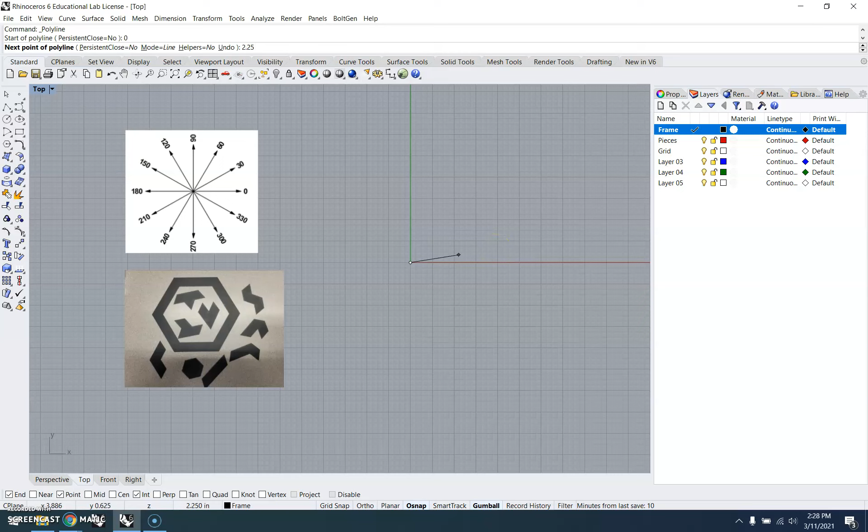So the first thing that I'm going to do is draw the inside of this frame because that's going to be the most important part. I measured and I found that this side right here is 2.25 inches. So I'm going to start with the polyline tool and I'm going to start at 0 just because I like starting at 0. And I'm going to go 2.25 and this time I'm going to go comma 0. What that's going to do is make sure that my line is straight on the x-axis to start with. That way I don't have things rotated funny.

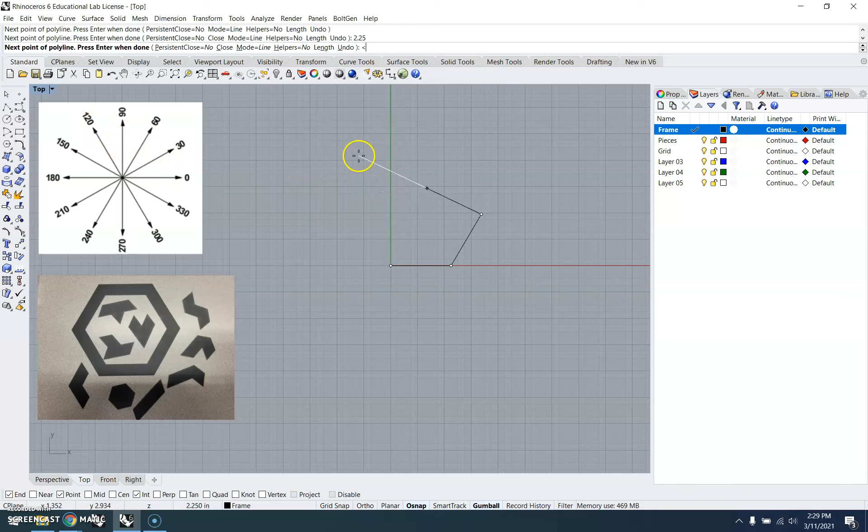And then when I draw this part right here, I'm going to type in 2.25, hit enter, but now I need to use the less than sign, which if we hold shift and click on the comma button, it'll do less than, and then type in 60. Okay, and you see that snaps to 60 degrees because that's that first angle that I want. And then we're going to go 2.25, enter, less than. This time it's going to be 120. So 120, enter, and it'll go up there.

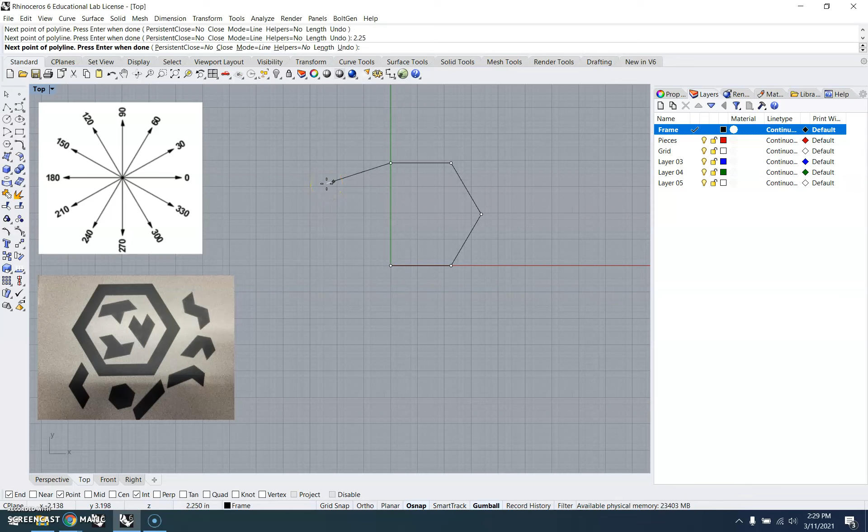Next one's going to be 180 degrees, so 2.25, enter, less than 180, enter, and click. Next one's going to be 240 degrees, so 2.25 inches. Enter, less than 240, enter. We pull that down, and then we can just close our hexagon.

Now I'm going to do an offset to draw the outer one. I measured across here, and it's 5/8 of an inch. We could put that in as 5/8, or we could put it in as 0.625. Either way will work. So I'm going to click on the frame that I have, type offset, go 0.625, enter. And then I'm going to drag it outward. By doing that, I've created this frame that we have right here.

Now I'm going to switch to my grid layer. The grid layer is white, so I make sure I put the check mark next to that. And what I'm going to do is create a grid in here that aligns with the sides of my hexagon. I've measured these pieces, and I know that the shorter straight edges here are 3/4 of an inch. So we're going to create a grid so that we can more easily draw all our pieces based off the grid rather than having to punch in the angles for every piece that we do.

So I'm going to start with the polyline and I'm just going to click and I'm going to do less than 60. Okay, so it aligns right there and I'm going to make it longer than it needs to be. We'll hit enter, and that's okay that it extends out here. As I move this across, I want to make sure that it goes all the way across there. So now what I'm going to do is highlight it, and I'm going to type array.

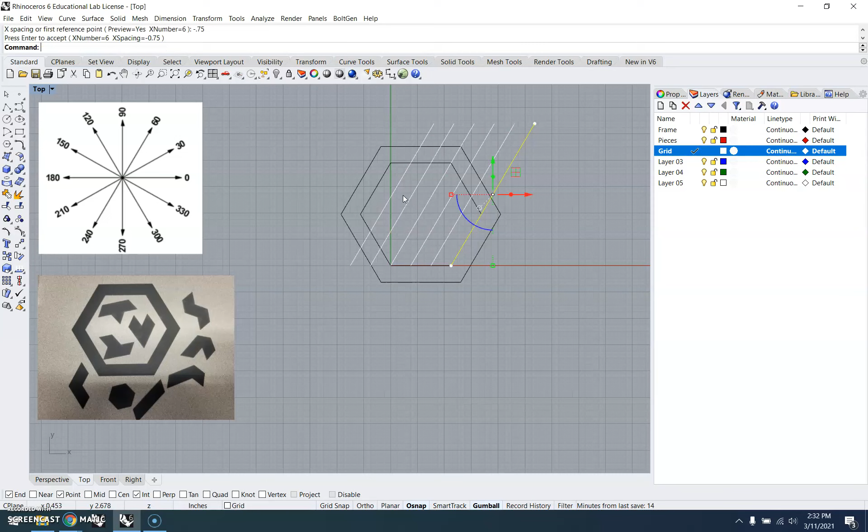So what the array command does is it allows us to copy multiple pieces at a specified distance, and it allows us to do that all at one time. Now I'm going to do the same thing based off of this one. If I remember my polar coordinate chart, it needs to be 120 degrees though. So polyline, we'll start down here, let's drag it up, do less than 120, enter, snap to that, hit enter to end my line, and then I'm going to do array again. So we'll copy that, we'll type in array.

We still want 6 in the x direction because they're going this way. So 6, enter, 1 in the y direction, so 1, enter, 1 in the z direction, 1, enter. The x spacing is going to be 0.75 because we want them to match up with each of these. Okay, so we're going to type in, this time it's going to be positive 0.75 though, because we're going to the right, and hit enter.

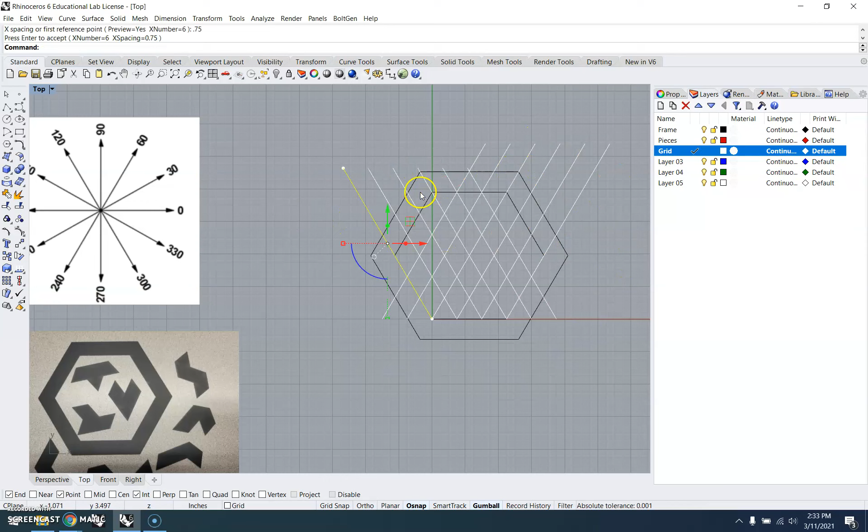And we just created the second part of our grid that goes across there. Okay, so these are at the proper angle to one another. Since that looks good, I'm going to hit enter, and it's okay that they extend up beyond here. That's not going to mess anything up for us. Now I need to do ones that go up and down. I could go and draw lines in that connect right here and connect these, but we're going to go ahead and use the array command, only it's going to be a slightly different one.

So I'm going to grab that. This time I'm going to toggle ortho on and just drag it out here a ways. Click and hit enter to end it. I'm going to select that line that I just drew and type array linear. When I start typing array, that automatically pops up down here as an option. So I'll click on array linear. Since I had 6 on each of these others, we know we're going to need 6 items. So 6, enter.

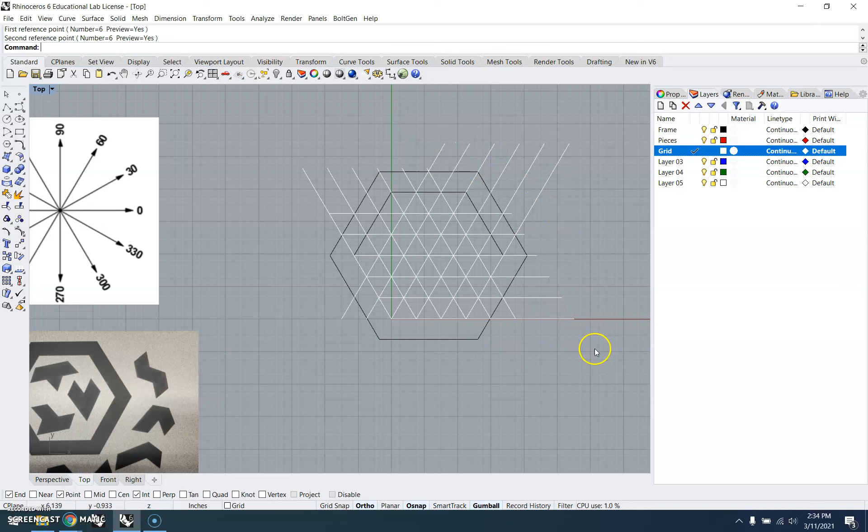And first reference point is going to be right here. Okay, so we'll click there. Second reference point is going to be that next intersection, which is why we had OSNAP INT selected. So we'll click right there. And it just puts 6 items up so that we have this grid. Now, if this bothers us out here, we can highlight all that. We can type trim, and we can get rid of all this extra stuff that's outside of where we need. We do have a couple little sections there that we might have to get rid of.

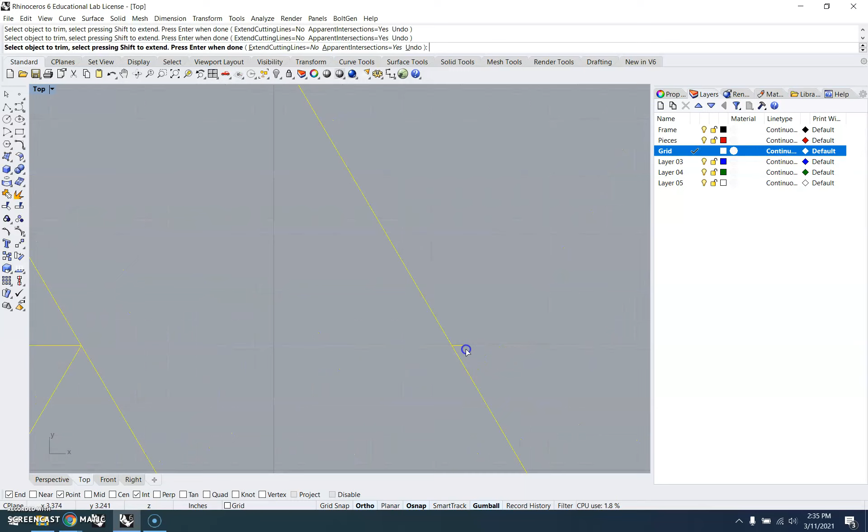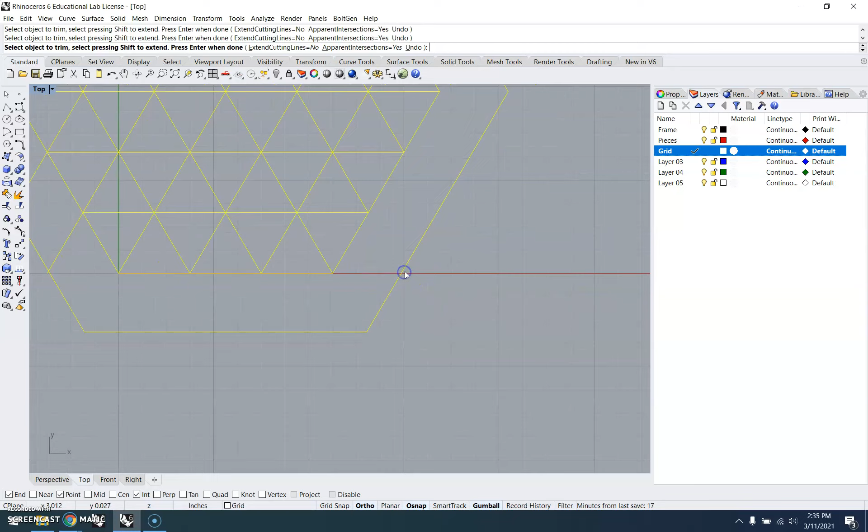We don't have to get rid of these. Okay, it's not going to mess anything up. But if you're like me and having all that extra stuff there bothers you, you can fairly quickly get rid of it. And basically, once we're in trim, we just click on anything that we do not want. And we're almost there. We've got 2 over here. Okay, so now we hit enter. We're done trimming. And now we're left with our grid. And that's okay that these turned white. That's because we drew a line there over the top of the black line.

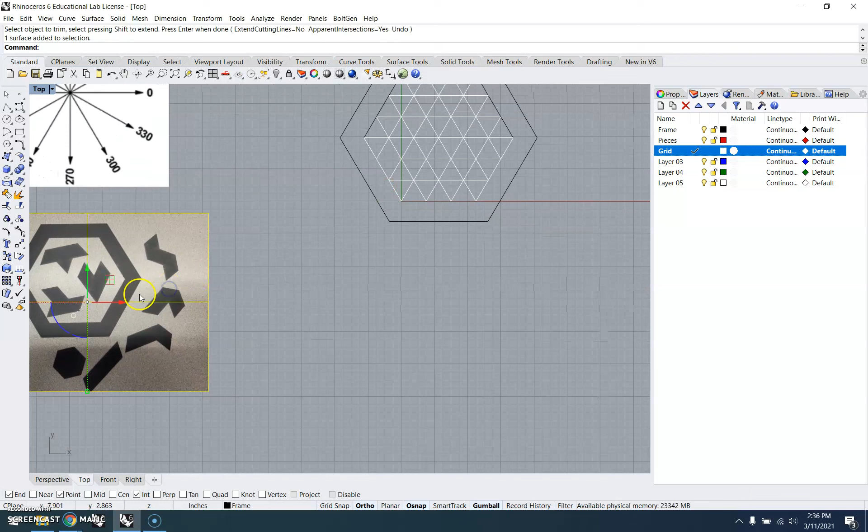So now, this is where, if you've already solved your puzzle, it makes it a little bit easier because you can figure out, okay, what pieces need to go where. I haven't figured this out yet, so we'll just draw one in there to show you. I'm going to switch to the pieces layer, so put the check mark up there. And let's go ahead and we'll just start drawing this piece in, and we'll draw it right here. So we can look and we can figure out, this is 2 units long there, and 2 units long there.

So using the polyline tool, I can just click and use the intersections. Oh, let's turn ortho off. Sorry about that. I can use the intersections to figure out where my lines need to go. Okay, so there's the first piece, which is that one right there. And we can keep adding in pieces, drawing them individually until we get everything drawn.

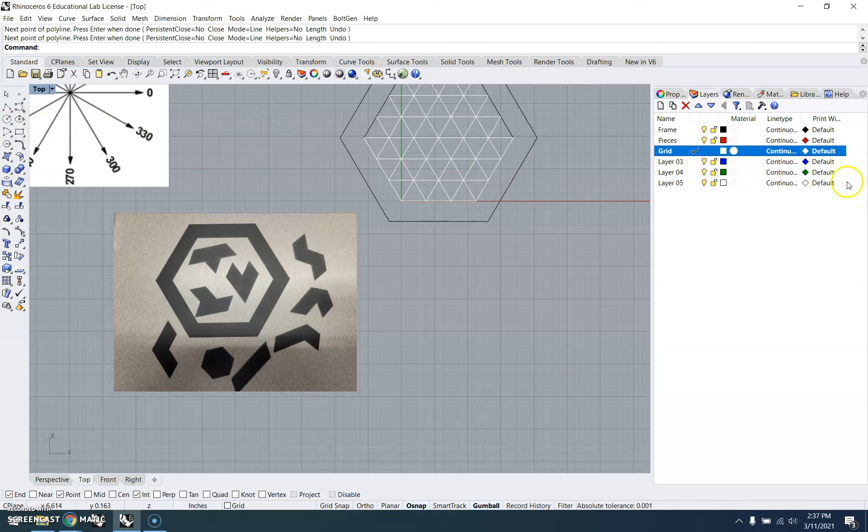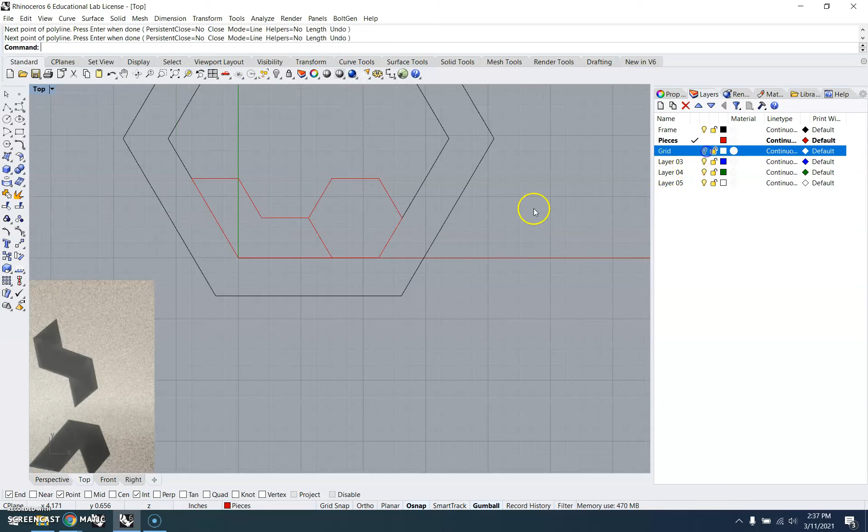So I'm going to do polyline again. This time I'll go ahead and do this one. Make sure I'm in the red layer. I'll do this one, but I'm going to start right here. And by creating that grid, that allows us to more quickly draw our pieces. Okay, we can turn that off and we can see, okay, there's what I've already drawn. We're looking good so far. Okay, and then we can go ahead and we can draw the rest of them in wherever they belong using that same technique of just following the grid that we've made.

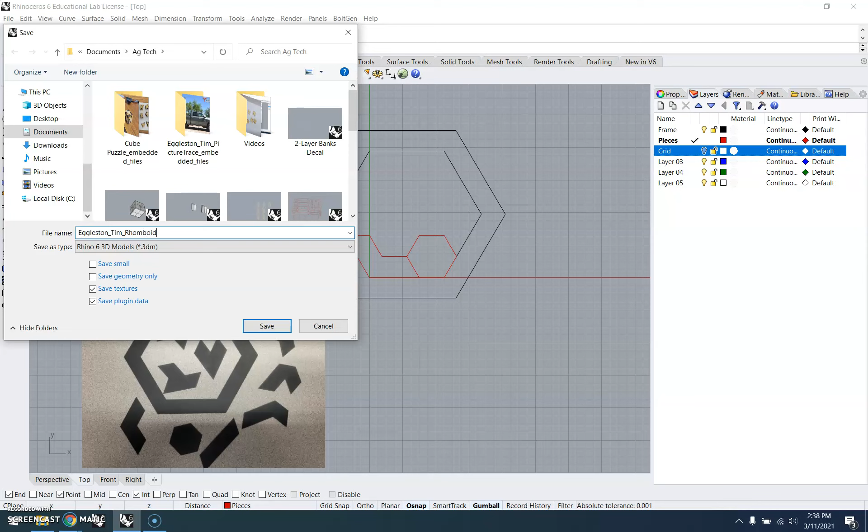When we're all done and have all our pieces, we can simply turn off the grid layer and we've got everything that we need right there. So then we can go ahead and save it. Make sure we use the proper naming system. So last name, underscore, first initial or first name, either way, and then underscore Rhomboid Puzzle. Hit save. Then we can go back to Canvas. We can find the Google Drive folder that we're supposed to upload it to, and we can upload it and mark it as done.